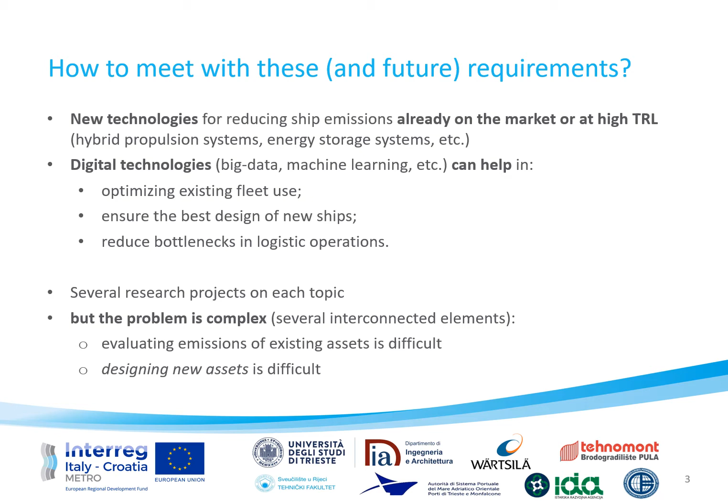So, where to start for designing a new sustainable maritime transport system? First of all, we need a proof of concept of the integration of new technologies on board different types of ships, in order to evaluate their impact as a whole, in all their operating conditions and planned routes.

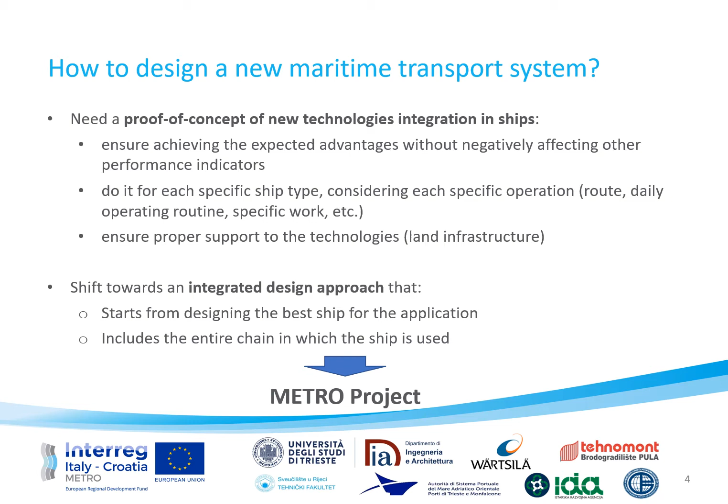We also need to ensure that the land infrastructure is capable of providing the required support for the correct operation of the new ships. Therefore, we need to shift towards an integrated design approach that starts from designing the best ship for each specific application and includes the entire chain in which the ship is used in the design process. This is the core of the Metro project approach.

Metro was developed within the Interreg Italy-Croatia collaboration program, which includes the Italian and Croatian regions facing the Adriatic Sea, and has the purpose of financing projects capable of improving the quality of life and the conditions of all citizens in the area.

In particular, Metro had the aim of improving the environmental sustainability of maritime transport in the North Adriatic area, focusing on touristic connections. The project had a length of 36 months, from January 1, 2019 to December 31, 2021, and its total budget has been nearly 3 million euros.

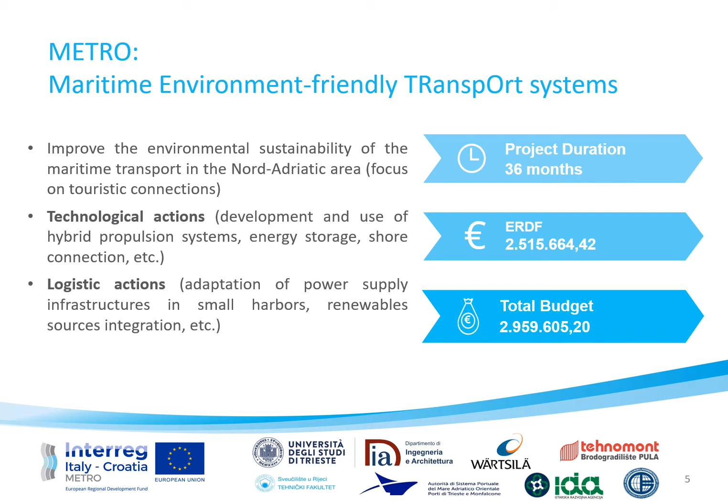Following the integrated approach presented before, the project coupled both technological and logistic actions, trying to tackle the problem from all sides.

To achieve the expected results, the project put together a wide partnership with significant expertise. The University of Trieste, with the Department of Engineering and Architecture, was the lead partner. Then there were Wärtsilä Italia and Tehnomont Shipyard as enterprise partners, the University of Rijeka with both the faculties of Maritime Studies and Engineering, the Port Network Authority of the Eastern Adriatic Sea, and the Development Agency of the Istrian County.

The project has been divided into 5 work packages, each dedicated to a single aspect: project management and coordination, communication activities, and then 3 work packages for technical activities.

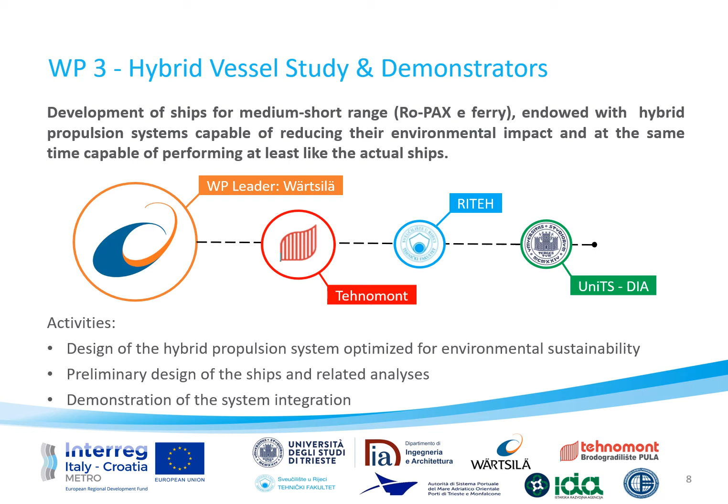Work Package 3 was dedicated to the development of new green ships, capable of reducing the environmental impact compared to present solutions. A Ropax and a ferry were selected as ship types, and 2 existing routes were considered: a medium one across the Adriatic, and a short one between Croatian islands. After the study of the best propulsion systems, the preliminary design for both ships was developed and relevant system integration points were demonstrated.

Work Package 4 was dedicated to the landside infrastructure and the regulatory scenario analysis, to study all the requirements for enabling the correct support of the green vessels.

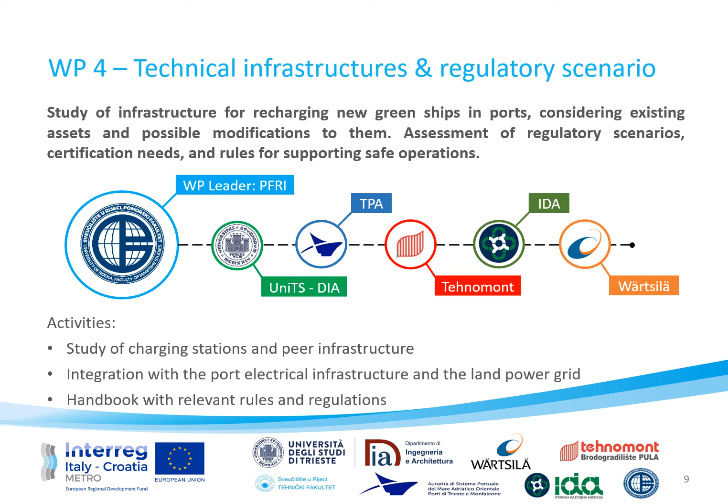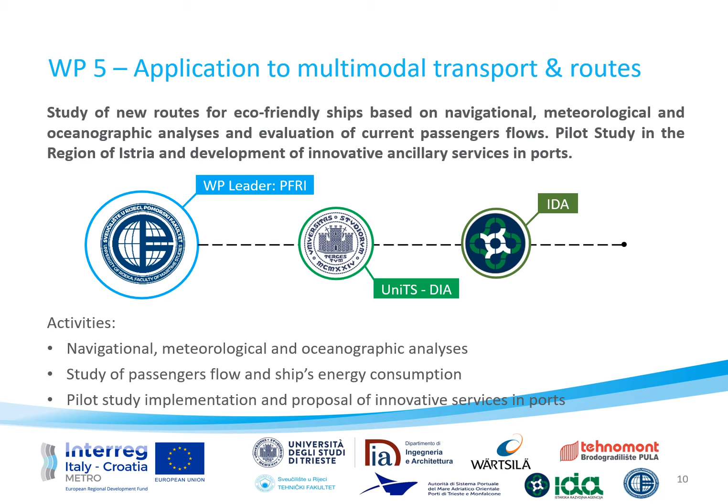Finally, Work Package 5 studied the logistic aspects, multimodality and eco-innovative services. Navigational, meteorological and oceanographic analyses were performed, passengers' flow and ships' energy consumption and emissions were studied, and a pilot study for monitoring the passengers' flows in the relevant ports was implemented. Furthermore, a new route for the design Ro-Pax ships that takes into account the actual ports and the future infrastructure was studied.

To the purpose of the project, the implementation of virtual prototypes was a fundamental activity to verify design choices and the integration of the studied innovative technologies on board the considered vessels. Virtual prototypes may be defined as computer simulations of a physical product that can be presented, analyzed, and tested from concerned product lifecycle aspects such as design and engineering, manufacturing, service, and recycling, as if on a real physical model. A virtual prototype contains all the information of a certain product necessary for its physical construction and its aesthetic and ergonomic evaluation. Virtual prototypes are a natural advancement of conventional 3D CAD models, providing an accurate geometry description, as well as integrated kinematic, dynamic, and physical properties.

A fundamental feature of virtual prototypes is their parametric nature, which allows managing possible design changes during the whole project lifecycle. Such flexibility enables both the automatic modification of ship dimensions and structures following designer inputs, and the evaluation of the best solution in terms of systems layout. All these aspects give to virtual prototypes a role of utmost importance within the innovative integrated ship design approach.

Construction and testing of virtual prototypes transform the virtual design models in direct design objects. In fact, a virtual prototype is subjected to checks, analysis, and simulations, and comes to coincide in substance with the finished product itself, allowing to extrapolate a high number of outcomes. In addition, a virtual prototype provides a 3D parametric master model that can be accessible through virtual reality, thus enabling a rich visualization of design choices and analysis of physical fit of components and arrangements, to include verification of intersections between hull, systems, and structures.

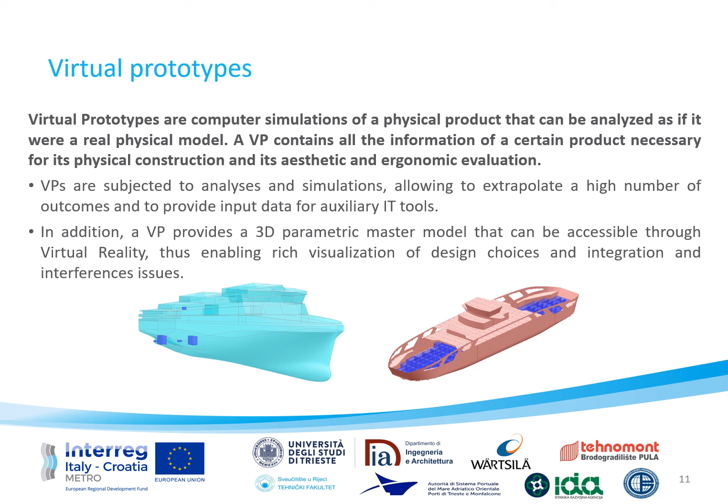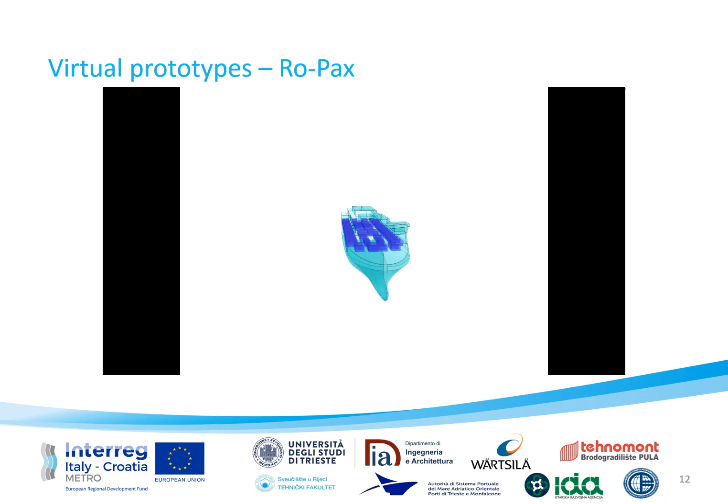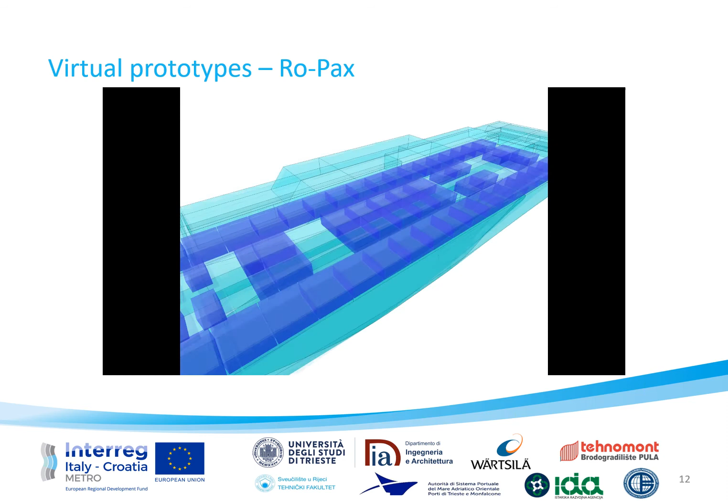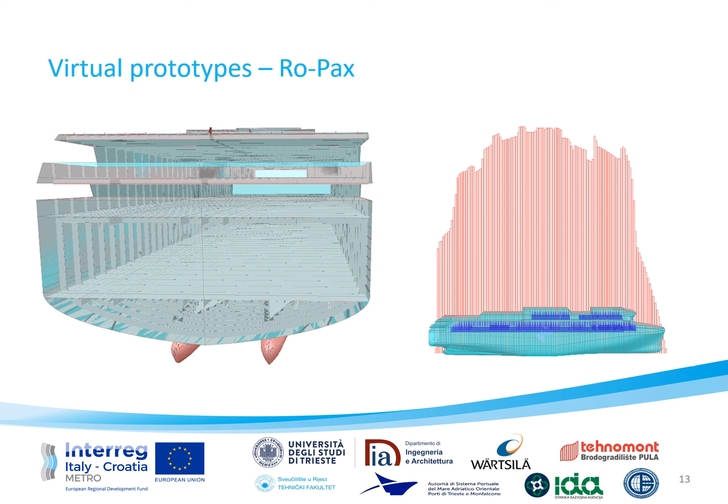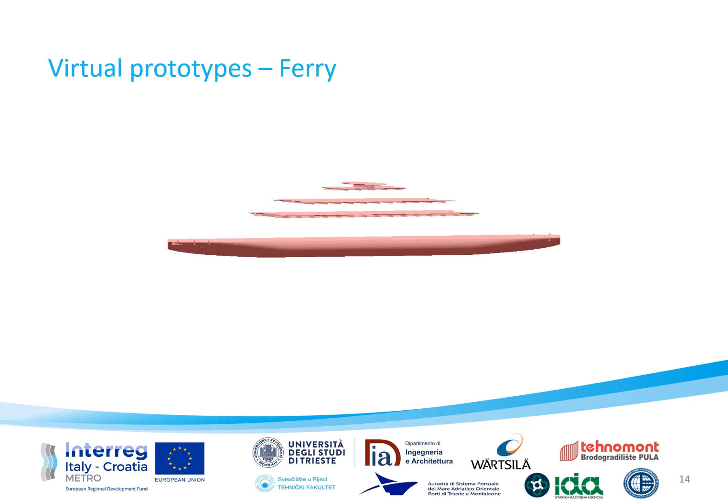As for the virtual prototype of the ferry vessel, here's a video in which we can see the different structural elements of the hull. We started from the bottom shell and grid, and we proceeded with modeling the various decks with their structural members. By adding the side shell platings and refining the superstructures, the entire model of the ship was completed.